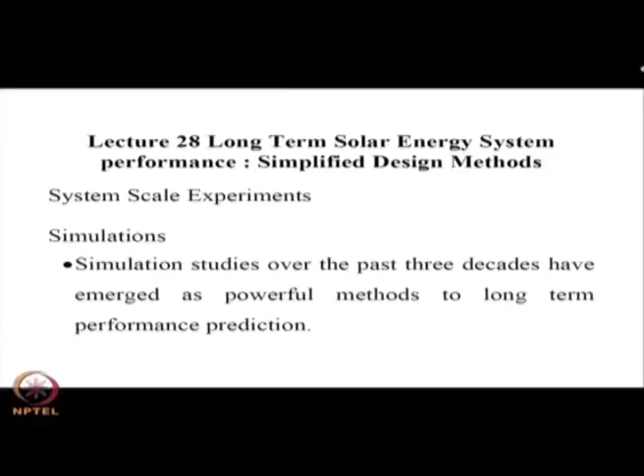The methods available to us are conducting system scale experiments, which could be time taking and of course also expensive, and the effect of parameters cannot be easily studied. Because if you do an experiment for one year with one slope and if you want to change it for another slope, you need another year of study to get that perfect. So, simulations turn out to be the via media, that means you mimic the solar cycle.

You model each component, knit together those models, and give the output of the first module as input to the next module, like for example a solar collector dumping useful energy into the solar tank where the temperature increases, which goes to meet the load. So, we can develop models for a number of types of components, and these things have proved to be effective, taking a fraction of the time—it does not require a year.

And these simulations basically depict the system into several components and employ models to describe each component's performance. The components are coupled with appropriate linking modules. So, this requires a detailed meteorological database.

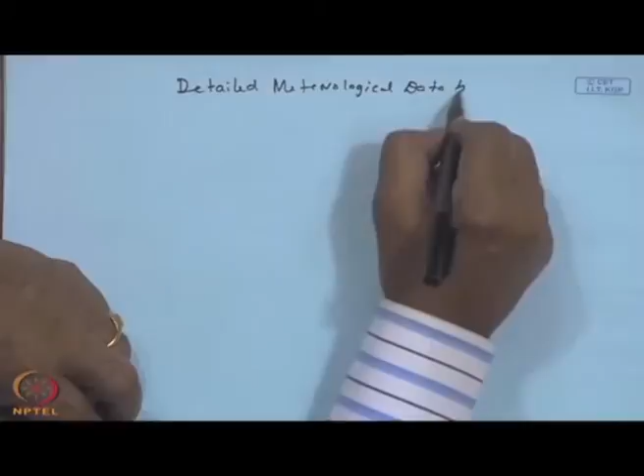One issue is the availability of data and the ready availability of the data. For example, if you consider Indian meteorological stations, monthly averages are available even on the net, but if you want hour by hour data, one has to acquire it from the meteorological station or office in Pune, and then all these numbers may have to be converted into a tape or put into a computer program to get that, which is a laborious task. But however, if it is done once, it can be used.

The other thing is, most of these meteorological stations are at the metros or the cities. It is very likely, because of the premium of the land, that solar energy systems are likely to be installed at smaller places, maybe villages, where actual data collection did not take place. So, in the long run, we might say, though simulations are cheaper, it requires the skill of experts to stitch together the component models, and it requires of course a detailed database.

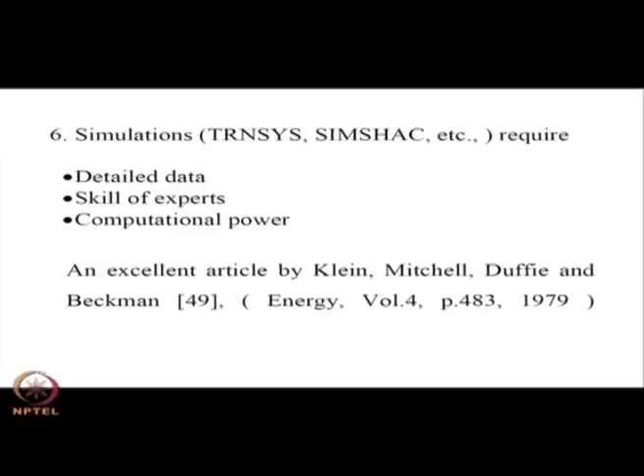So, in one sense, you may say somewhat disadvantages are that you need detailed data, skill of experts, and computational power. So, people have tried to lessen the computational requirement by using a reduced data set, or even at times resorting...

...to synthetic data. Basically, synthetic data mimics the meteorology of the particular location, though it may not exactly satisfy hour to hour, day to day, but in general it will reproduce the averages, which are good enough to get a performance monthly wise or yearly wise.

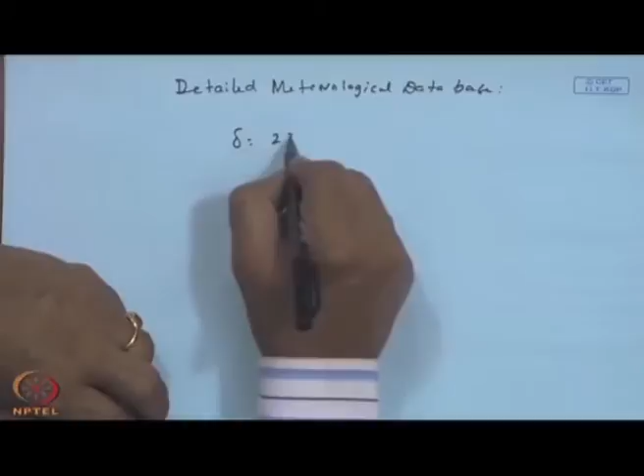This leads to an advantage: almost all the data can be generated through a sort of equations, though your component models could be analytical, which can be clubbed together along with this data. In other words, if I try to give an example, delta equals 23.45 something—this equation is much more amenable for computer implementation than a set of 365 values of data delta for each day.

Now, so if you consider, you will also notice many of the systems are standard systems.

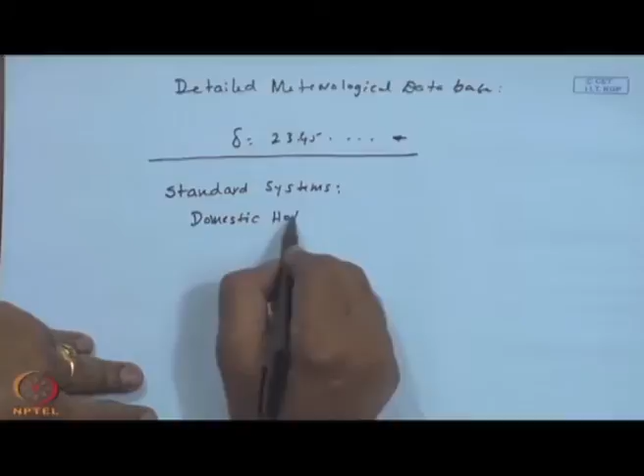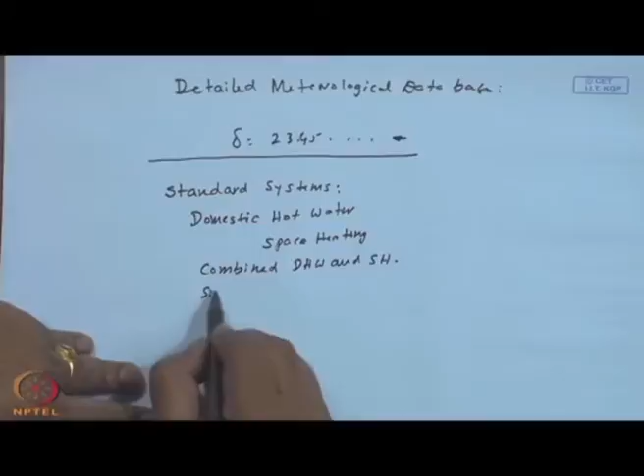Most commonly used could be a domestic hot water, or space heating, or a combined domestic hot water and space heating, or a simple process.

Hot water is used in industry too. For example, if you consider the silk industry, the cocoons are put in boiling water at a temperature of about 80 to 85 degrees. Degreasing is also done around 80, 85 degrees. So there are a number of applications where hot water is required at a given temperature.

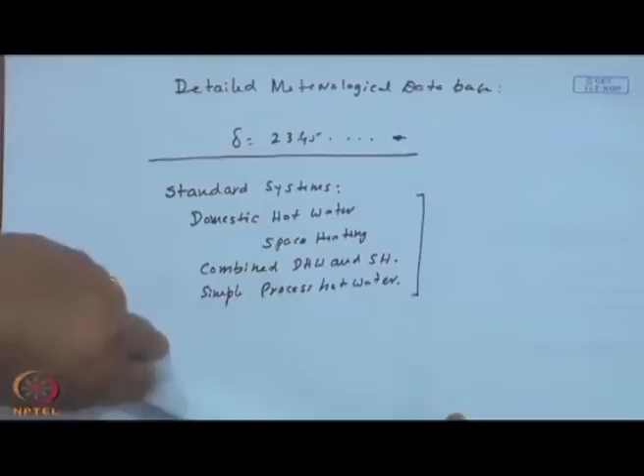These are some terminologies which have become more common in the US, which when we translate to Indian conditions I shall point out slight differences, one has to be a little careful. For example, space heating.

T above 20 degrees C is acceptable. Generally, the comfort condition is approximately 20 degrees centigrade in the room. So any energy available at or above 20 degrees centigrade is useful and can be utilized for the purpose of space heating. Similarly, for domestic hot water, although you may be taking bath at a higher temperature and washing dishes also at a higher temperature, above 20 is also useful.

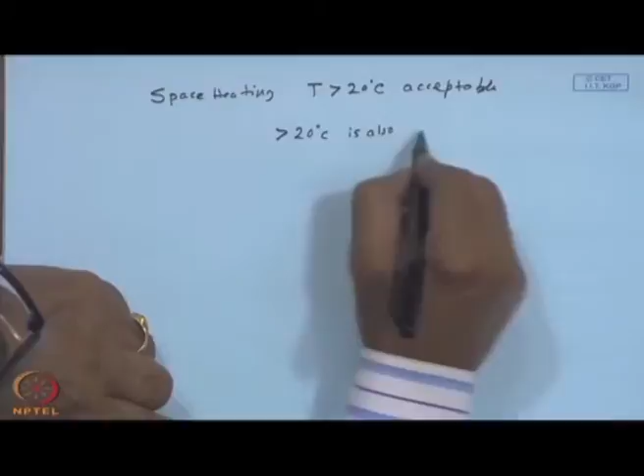For example, if your ambient temperature or the mains temperature is much lower than 20, like 10 or 11 degrees, even to wash your hands you need 20 degrees as a comfortable condition. So particularly in cold countries, there is a lot of application where water needs to be heated from the main supply temperature, typically 11 degrees in the US, to 20 degrees or above.

The methods we are going to talk about, it does not mean they supply only at 20 degrees; they may supply more than 20. But for meeting the load, it is not acceptable to have anything less than 20.

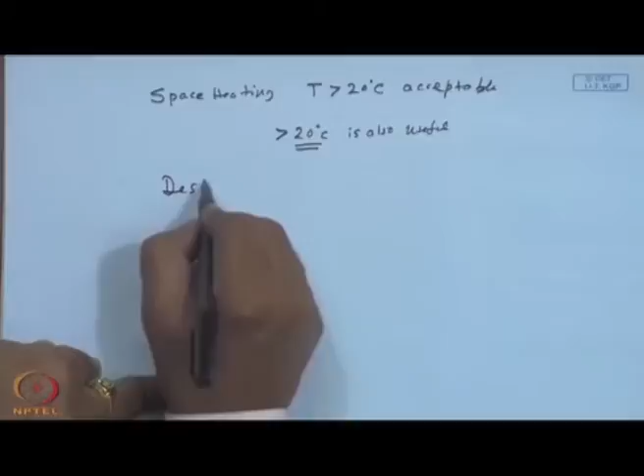Since there are a large number of applications of standard systems, people have come out with what are called design methods. Simulations do serve their role whenever you want to design a large, unconventional system. For large systems, say power generation or solar furnace or solar desalination, every specific detail of that location has to be taken into account, and the investment may be of the order of few crores, so simulation cost is worth it. But if you want 60 liters of water at 60 degrees C for domestic water heating for bathing, the simulation cost may remain the same, but the system cost will be only a fraction of the power generating system. So simulations are not that welcome, and one goes for the standard design method.

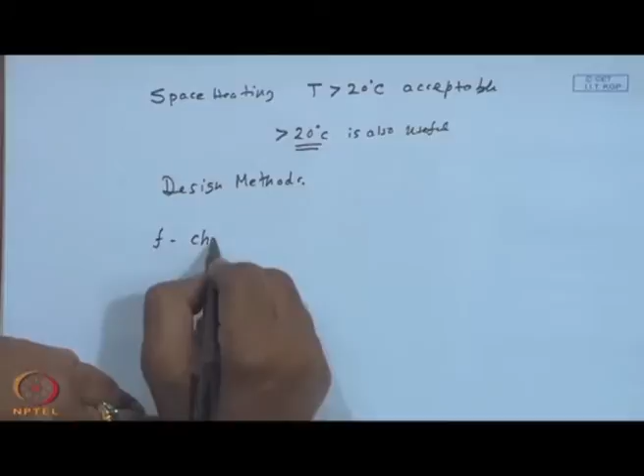This has also been the need of the industry, to have a simplified method without calling for the skill of experts. So some of the resulting methods are popularly referred to as, one, the F chart method, again developed at the University of Wisconsin, Madison, and the other one is the phi bar F chart method.

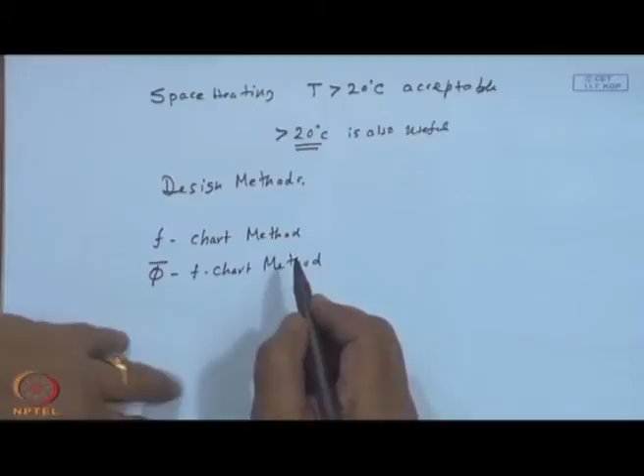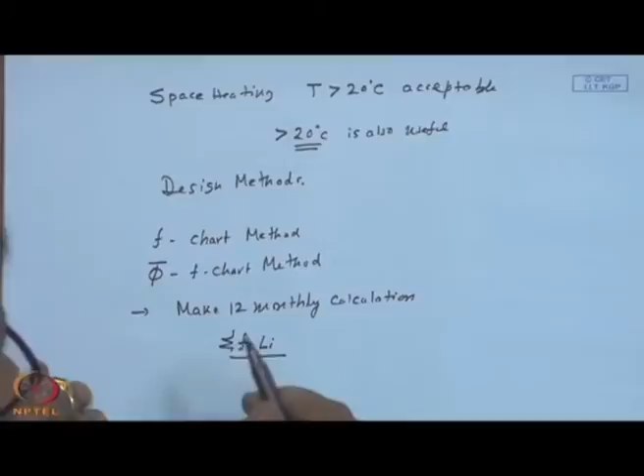I have given the references. These methods make 12 monthly calculations. As we have discussed at length, for solar energy systems, the solar load fraction is the performance indicator. If F is the monthly solar load fraction Fi, and Li is the load on the system for month i, for i from 1 to 12, this gives you the yearly solar load fraction.

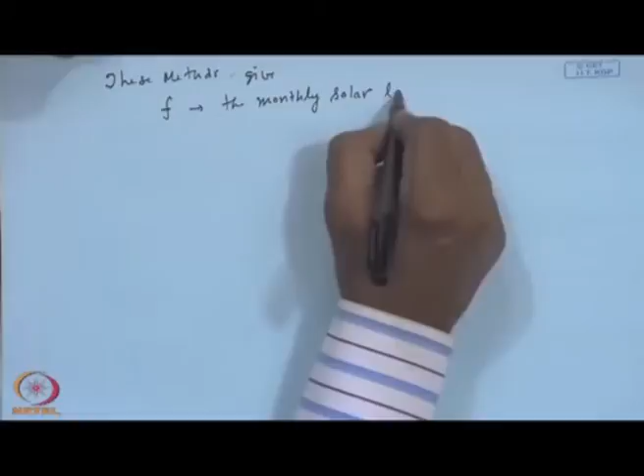So this F chart and phi bar F chart method will essentially give you F, the monthly solar load fraction. We have also discussed earlier that if the energy supplied by the solar energy system is in excess of the load, that excess is not taken into account. So F is always less than or equal to 1.

Now, what is the difference between these two methods? The F chart method is applicable if energy supply at or above 20 degrees centigrade is accepted. So again, contenders could be domestic hot water and space heating and a few other such applications which accept 20 degrees C.

And then in the phi bar, F chart method, you specify T minimum. In other words, you can specify that we want the energy delivery at or above a particular temperature, 60 degrees, 50 degrees, 80 degrees, whatever it is. So T minimum may be 60 or 80, etc.

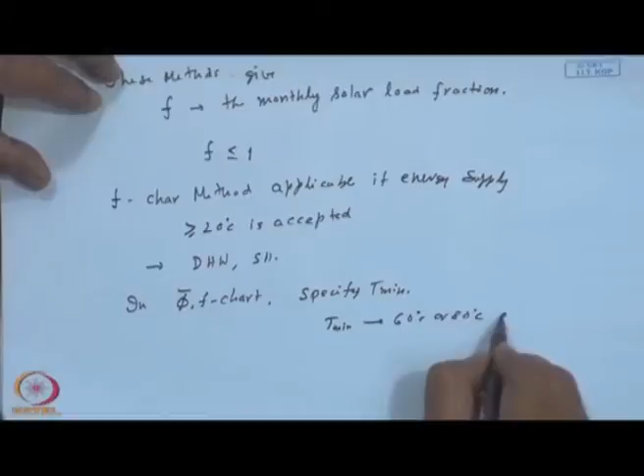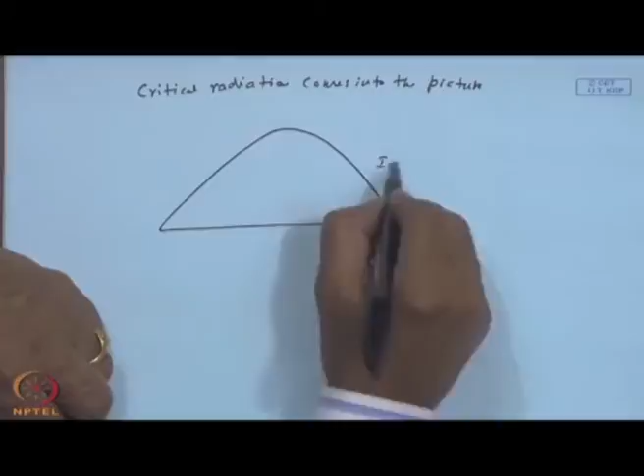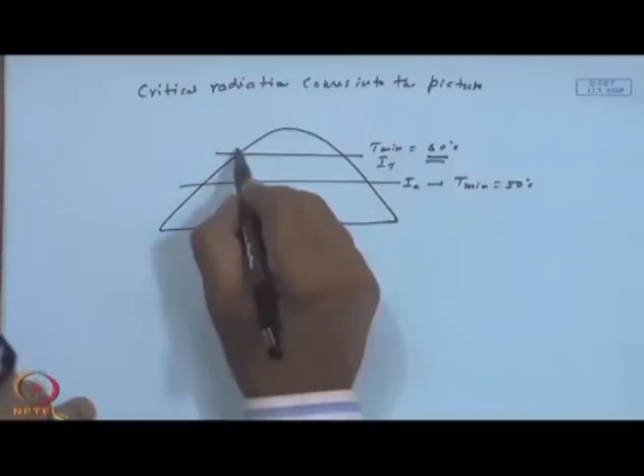Since you are imposing that the energy delivery should be above a particular level, my critical radiation level comes into the picture. For example, if this is the typical solar radiation distribution IT on the solar collector, this is the critical radiation level corresponding to a T minimum of 50, and this one corresponds to a T minimum of 60. So if you want energy delivery at or above 60 degrees centigrade, this part of the solar radiation is useful, whereas if it is at 50, this part is also useful.

So we shall find out what radiation is available above the critical level over a month, and that will be indicated by the so called phi bar, which stands for the monthly average daily utilizability.

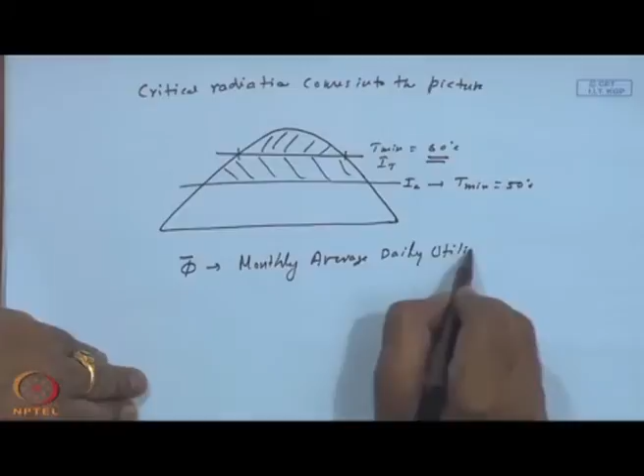We will spend considerable time on how to calculate this utilizability and what is its significance.

At this stage, I am pointing out that the F chart and phi bar F chart method differ because you specify a T minimum. Not all the solar radiation available corresponding to a particular level is useful; it depends upon the T minimum that you want. Higher the T minimum, lower will be the utilizability, and hence my useful energy supplied at or above that temperature, which constitutes a lower or higher solar load fraction. That is why the F chart method is modified with phi bar and called the phi bar F chart method. Now, if you look at it, what are the applicability?

These correlations first of all calculate monthly solar load fraction. So day to day how much of the load is met, it cannot give.

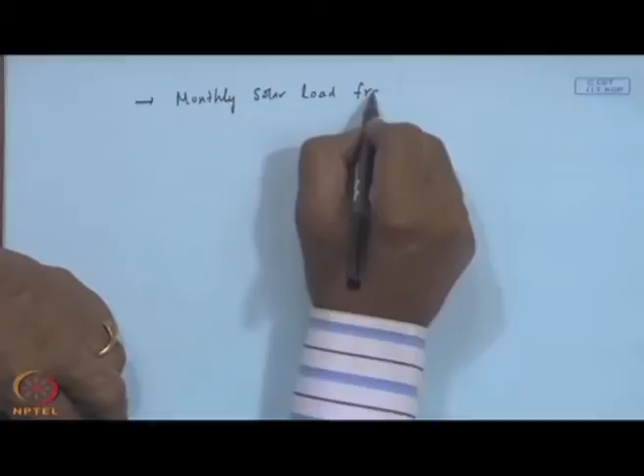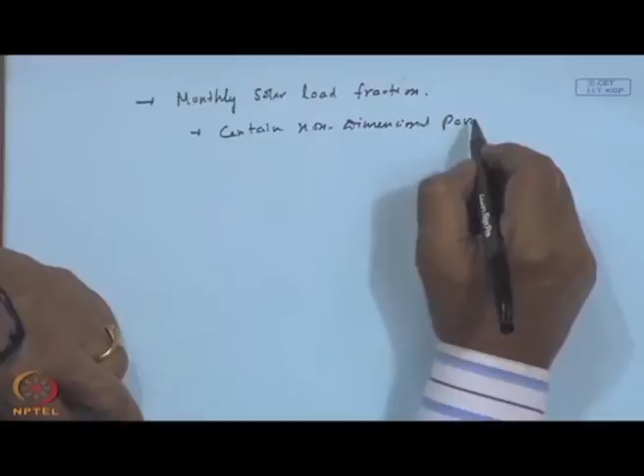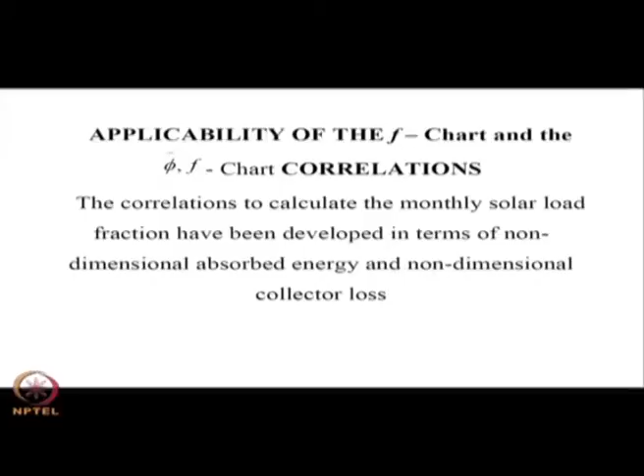They have been developed in terms of certain non-dimensional parameters. There are minor variations between F chart and phi bar F chart for some reasons. One is the non-dimensional collector loss, and the other is non-dimensional absorbed energy.

If this we call it x, and this we call it y, approximately f should be proportional to x minus y if there are no nonlinearities, provided they are consistently unit-wise, scale-wise defined. So you can expect a term like, sorry, it should be y minus x.

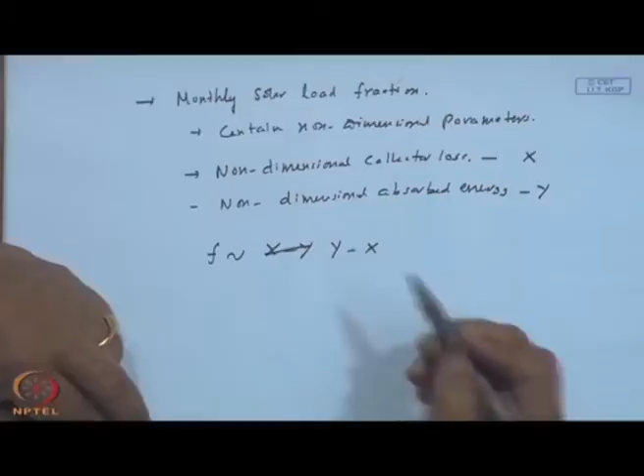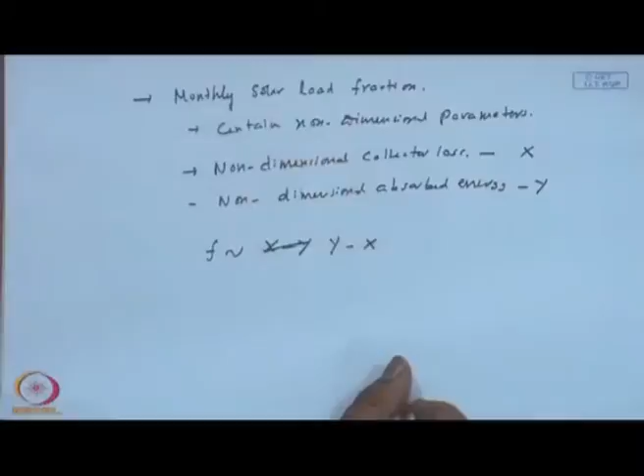Y minus X is the absorbed energy minus the losses. This is my simple useful energy equation, looks like the absorbed energy minus the loss. But on a monthly scale, because of excess energy, because of other losses, because of pumping, because of controls and so on, it will not be a simple linear function of y minus x, but it will be a nonlinear function, which we will see.

So that is why I have already explained the additional parameter is the utilizability that appears in the phi bar F chart method, which in a way takes into account at what temperature the energy is delivered. Now, how are these methods or equations developed?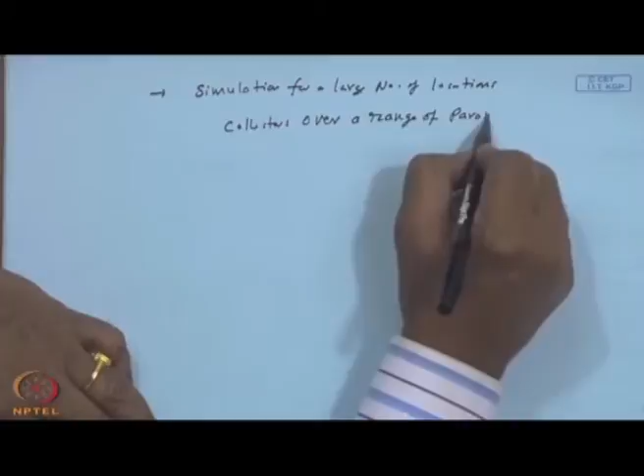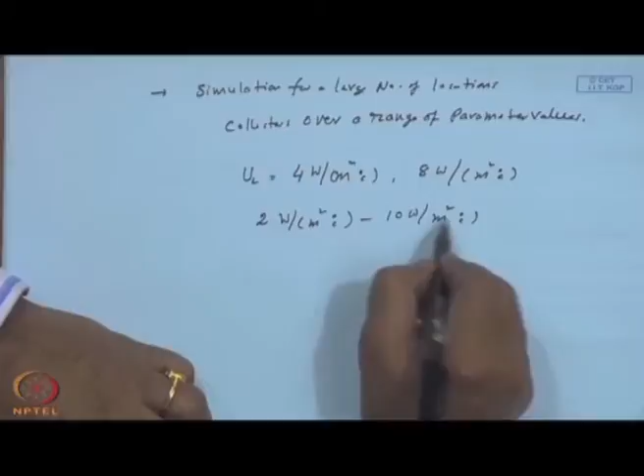You do simulations for a large number of locations, and for collectors, over a range of parameter values. For example, if you consider the overall loss coefficient, typically UL may be 4 watts per meter square degree Celsius for a 2 glass cover, or 8 watts per meter square degree Celsius. So if you do 2 watts per meter square degree C to maybe 10 watts, it will include an extremely good collector and also a fairly bad collector. That is how these correlations are developed.

Now, what do we mean by standard systems? Four figures are shown here. For example, you have a collector with a heat exchanger which dumps through another heat exchanger into the storage. From the storage it may go to an auxiliary tank, from which it goes to the tap. So that forms part of the combined liquid-based space and water heating system. And then through the delivery device and another heat exchanger, it goes to the house, which will be meeting the space heating. The auxiliary will come in whenever the solar is insufficient, either for hot water or space heating.

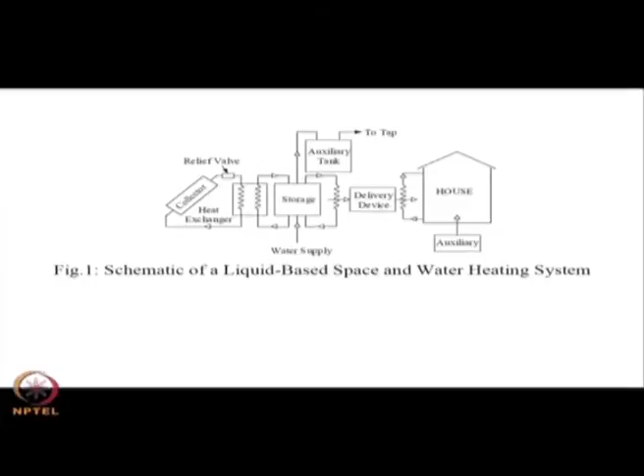So suppose I do not have a heat exchanger between the collector and the storage loop, I can put the effectiveness of the heat exchanger as unity, then automatically it takes care of the fact that the collector is dumping or delivering energy directly to the storage. If the auxiliary tank is not there, there will be no loss, and of course the delivery will depend upon the temperature available in the storage tank.

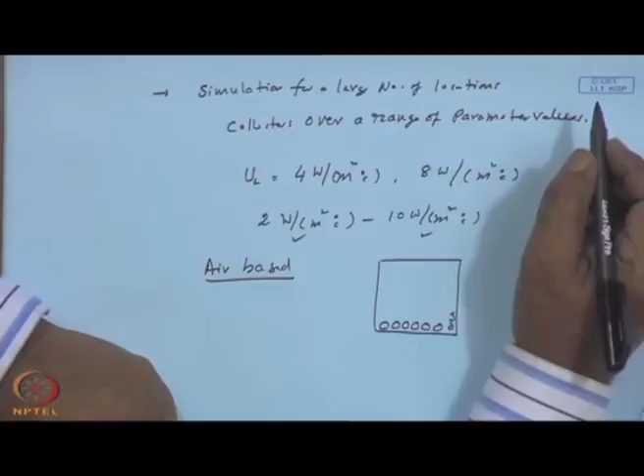Next one is a typical and similar system, but it is air based. The difficulty with an air-based system is you cannot store energy easily, because the product of specific heat and mass is smaller. So what you do is, rather it requires a huge volume with losses, you store the energy in the so-called pebble bed. A pebble bed is nothing but a pit, which you can put underground with about 1 inch pebbles all packed. So when there is excess energy, the hot air goes through that, heating the pebbles, and then when there is no solar energy, cold air goes through the pebble bed, picking up the energy that was stored during the charging time.

So the third one is a closed loop system. Similarly, an auxiliary heater is put again in series, so that it can make up the deficiency in the temperature or deficiency in the quantity.

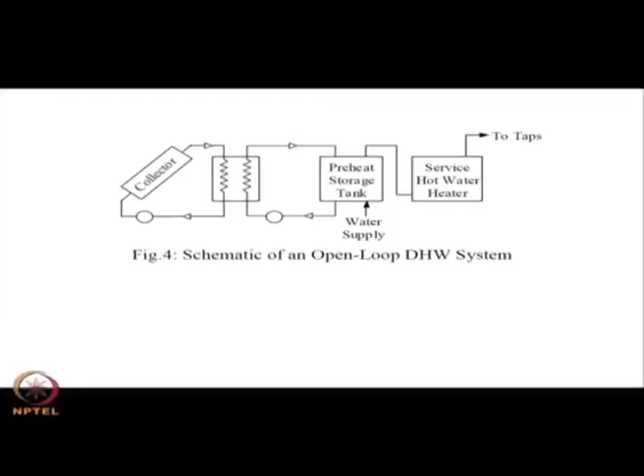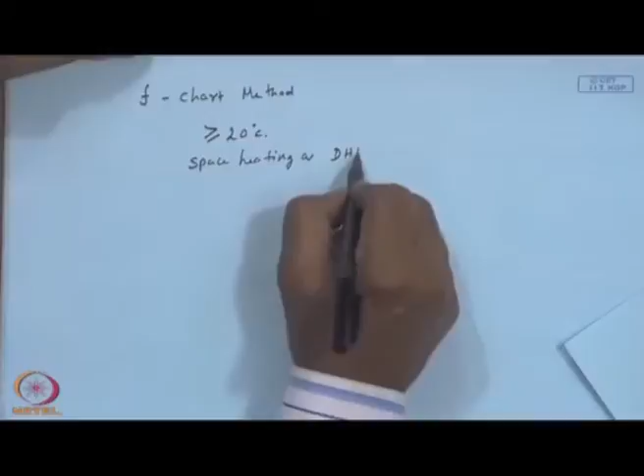Now, if I try to separate the F chart and phi bar F chart method, somebody can ask what are the limitations, or under what conditions the F chart method is applicable. So at or above 20 degrees Celsius, generally we said it applies for space heating or domestic hot water, and is also used for service hot water with a modification.

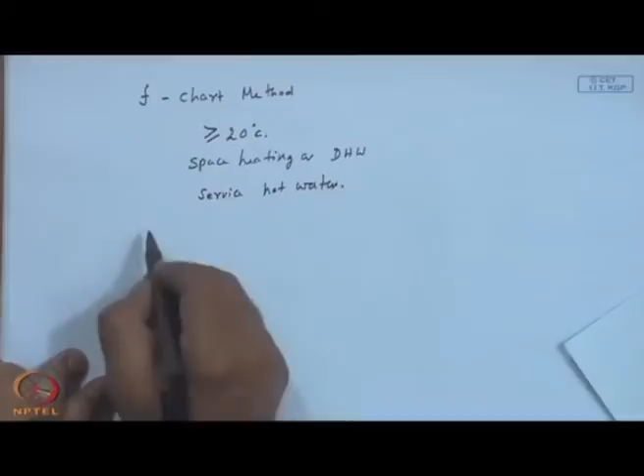It is correlated to two non-dimensional variables: a non-dimensional collector loss. So F is a function of x and y, where x is the non-dimensional collector loss, and y is the non-dimensional collector absorbed energy.

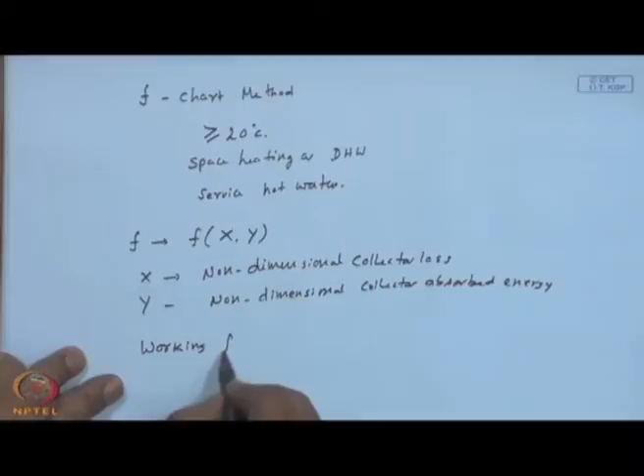The specific numbers form will be the same. Correlation for air based systems and liquid based systems differ slightly. In general, air based system means the working fluid in the collector that picks up the useful energy is air. I have not really seen or heard of a gas being used instead of air, except in some refrigeration applications where people are trying carbon dioxide, etc. In liquid based systems, mostly it is water, though antifreeze, glycol, etc. may be used, or a thermic fluid also can be used, where the thermal capacity characteristics will be better, so that your storage will be less volume wise, etc.

In F-chart and phi bar F-chart, they assume all the collectors are connected in parallel, so that each collector receives the same inlet temperature, and if the size and everything is same, delivers at the same temperature. Consequently, the performance will be a function of the number of collectors, or the area, directly proportional.

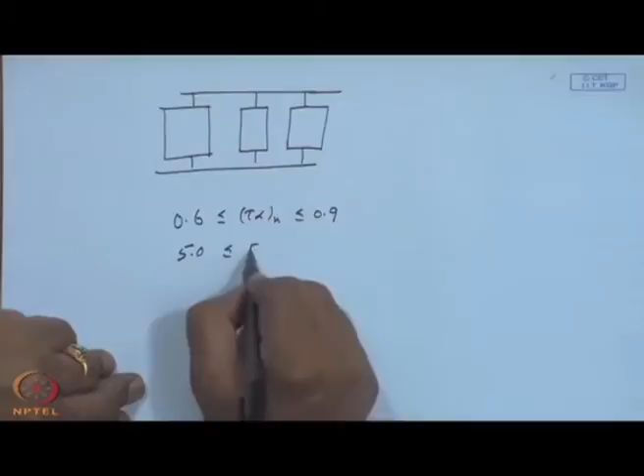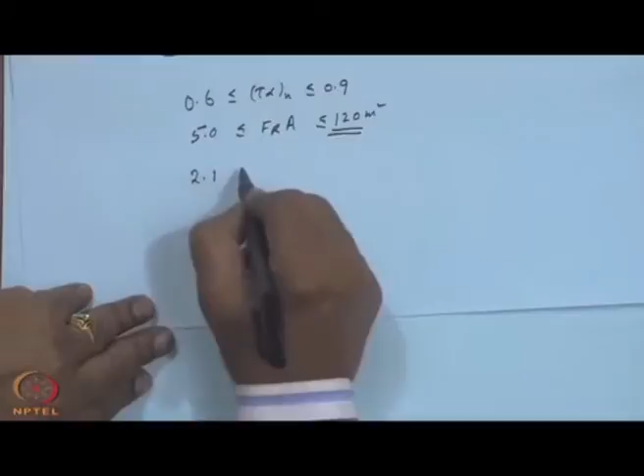This is a wide range for which the simulations have been developed, based upon which the correlations have been formulated. First, the material property, tau alpha normal, ranges 0.6 to 0.9. This is the product of heat removal factor and the area of the collector, up to 120 meter square. This appears somewhat lower, but possibly assuming linearity one can go for a higher range also, though strictly speaking they are expected to give acceptable results when applied in the ranges we are specifying. UL can vary from 2.1 to 8.3 watts per meter square degree C, and slope beta ranges from 30 degrees to less than or equal to 90 degrees.

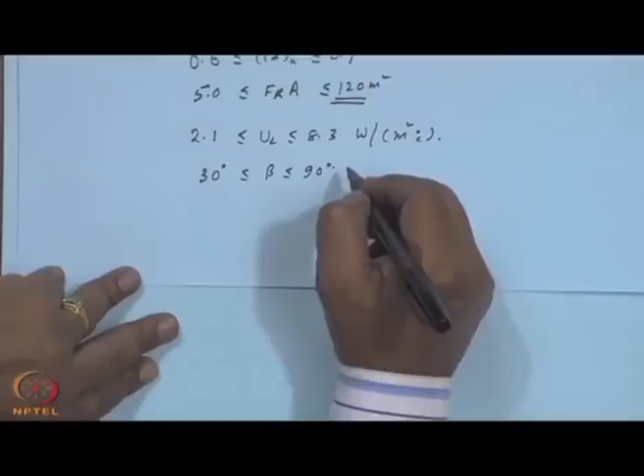This seems to be a little limitation if you apply it for a tropical climate, let us say southern India, where your latitudes will be lower than 30. In fact, most of India is less than 30 degrees, so this beta may be a limitation, and this will come up again.

Building heat loss coefficient is measured in watts per meter square per degree C. U is the overall loss coefficient, and A is the surface area of the building. U into A gives a product which, when multiplied by the temperature difference outside, gives the loss taking place from the house. From this loss, I can calculate the space heating load.

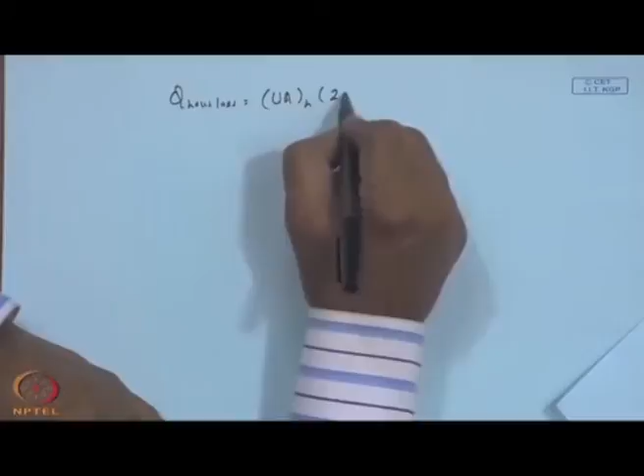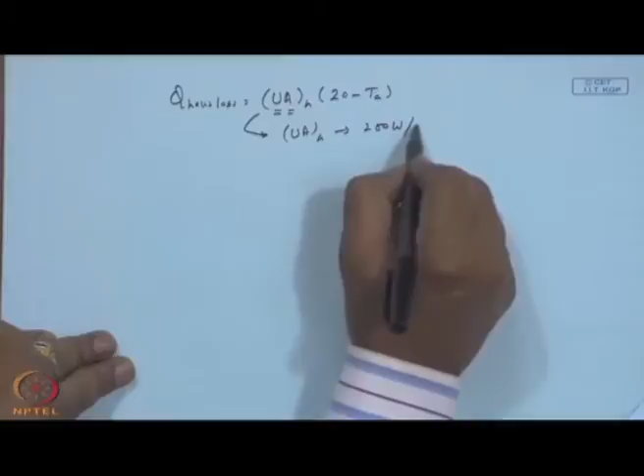If the house is kept at 20 degrees C and the ambient is, say, 13 degrees C, then Q house loss equals UA of the house times 20 minus T ambient, in a simplistic manner, though it may have to be averaged or weighted averaged over a period of time. This is the overall loss coefficient multiplied by the participating area multiplied by 20 minus T ambient. For a standard construction of 1 or 2 bedrooms, UAH typically ranges from 250 watts per degree C to 600 watts per degree C, depending upon how well it is insulated.

This is used for calculating the space heating load, and the other symbols like UL, FR, tau alpha normal and beta we are already familiar with.

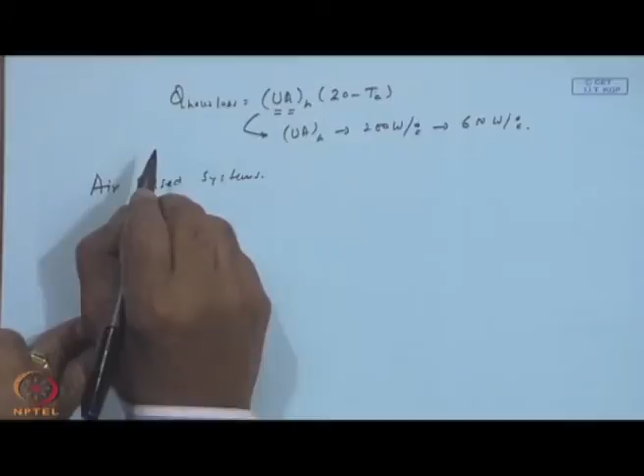For air based systems, there are other variables besides tau alpha, A, FR, UL, beta and UAH. What is the flow rate, particularly for air based collectors?

In the case of air collectors, the heat transfer coefficient strongly depends upon the air flow rate, and the stratification in the pebble bed may be seriously affected depending upon the flow rate. In other words, you expect higher temperature air to be at the higher level because of lower density, and if a gust or blast of air goes through with high velocity, this stratification may be disturbed. Consequently, storage performance will be affected if the flow rate is too high. So there is a standard flow rate for which the simulations have been made.

That standard flow rate is 10 liters per second per meter squared.

Yes, 10 liters per second per meter square of the area. So, you expect that the correlation to be valid if your flow rate is around 10 liters per meter square, 9.9 is fine, and the storage size

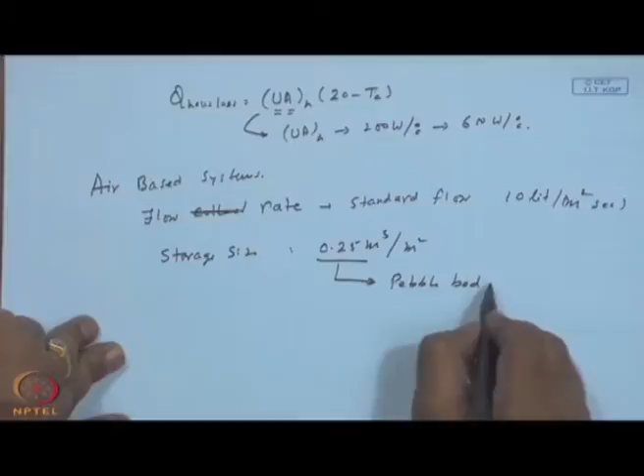is 0.25 meter cube per meter square. This is the pebble bed volume, the pit we were showing earlier in the figure. So, you provide 0.25 meter cube per square meter of area.

Now, if you take into account the specific heat of the pebbles, roughly 1 inch size and randomly packed, this may correspond to a heat capacity about 350 kilojoules, which will be relevant in the case of water heating systems, once you specify the mass specific heat product of the storage tank, assuming the fluid to be water.

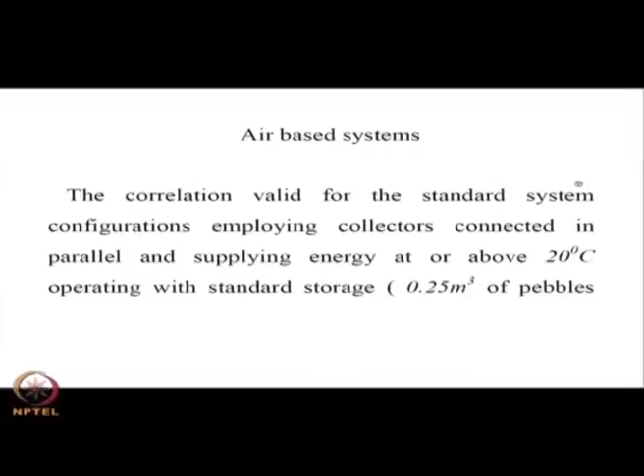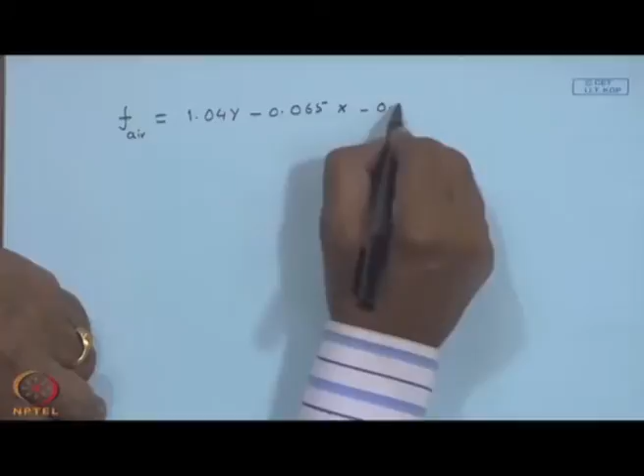So, the solar load fraction for air based systems. For the sake of clarity, I will write F subscript air equals 1.04 y minus 0.065 x minus 0.159 y squared plus 0.00187 x squared minus 0.0095 y cube, where x is

the non-dimensional collector loss, F r U L times 100 minus T A bar into delta tau times collector area A C by L. So, this will be non-dimensional. If L is in joules, U L will be joule per second meter square degree centigrade, and delta tau will be in seconds, area will be meter square, and this temperature difference is again degree C.

So, this U L is in this much, so numerator is joules and denominator also is in joules. Now, what you will find here is the number of seconds in the month is delta tau.

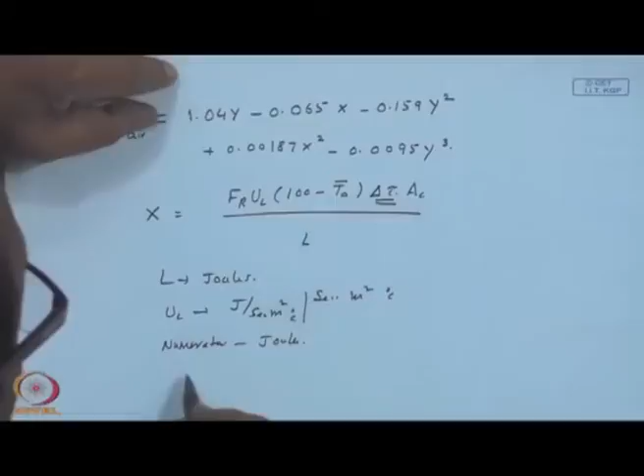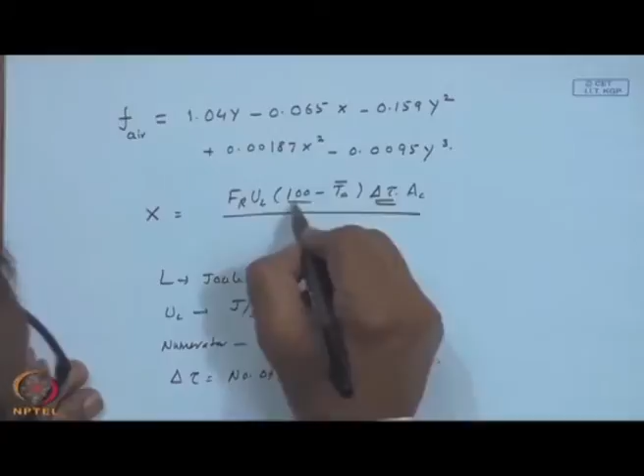AC is area. It is not unexpected that the loss factor should be proportional to the U overall loss coefficient. Of course, this is a non-dimensional factor: the time, area, and 100 minus T A bar. This 100 has nothing to do with the boiling point of water, though I think it somehow gives that impression.

It's just that 100 minus T A is used to scale x. If I put it as 20 minus T A, or whatever is the collector operating temperature minus T A, we may get too large or too small a value for x. So, it is desirable, whenever you have any empirical correlation in general, that if the variables are of comparable order of magnitude, your accuracy will be better.

If x is something like 0 to 10, y is 0 to 3 or 0 to 4, you will have a better correlation. Instead, if y changes from 10 to the power 6 to 10 to the power 9, and x changes from 10 to the power minus 3 to 10 to the power minus 1, the effect of x, I mean y, will be completely lost, because the scales of those numbers are hugely different from each other.

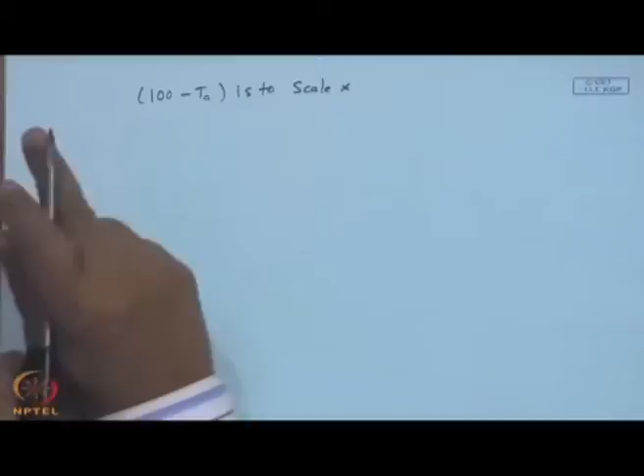So, that is the non-dimensional collector loss, and I will again make a comment after I define this y, the non-dimensional absorbed energy: F r tau alpha bar into H T bar times n into A C upon L. A C is the area, n is the number of days in the month, H T bar is the monthly average daily radiation on the collector surface, multiplied by the monthly average transmittance absorptance product, multiplied by the collector property heat removal factor upon the load.

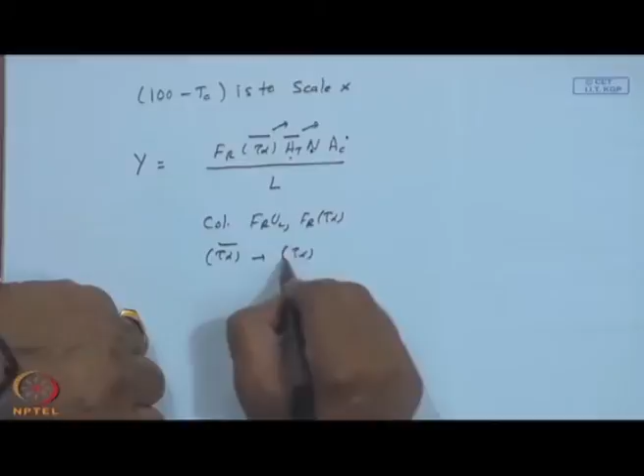Now, you will understand all the processing we have done is to get this H T bar, get this tau alpha bar, and of course, in the previous definition of x, U L and F r. That means my collector parameters: F r U L and F r tau alpha, and then my tau alpha bar comprising of tau alpha bar beam, tau alpha bar diffuse, tau alpha bar ground.

So, all the trouble we have gone through is worth it. It comes into the picture now in calculating my y, and the geometry is related ultimately through F r. So, these symbols are explained, and L is the load on the system. So, given the collector parameters, I can calculate.

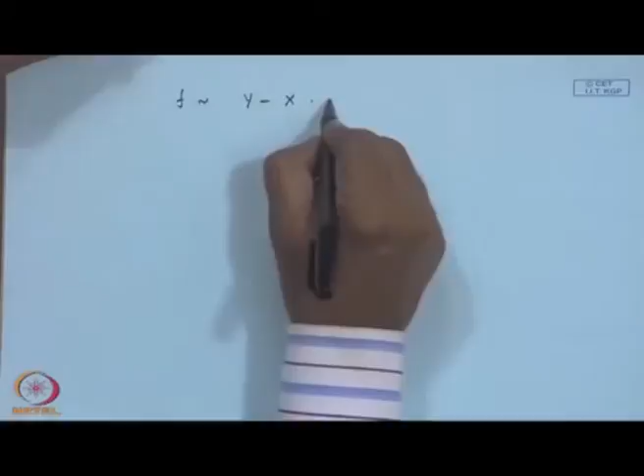Now, the comment I was trying to make was, initially I just said that f should be, because non-dimensional, y minus x. Of course, there are non-linearities, x squared and y squared, because of the losses, etc. So, the constant associated with y is 1.029 y, pretty close to 1, whereas this is 0.065,

approximately 1 by 16th, which without the benefit of a computer, what I think is: 100 minus T A is inflated by a factor of 4, and delta tau is inflated by a factor of 4, because typically if the collector operating period is 6 hours, the losses do not take place from the collector all 24 hours.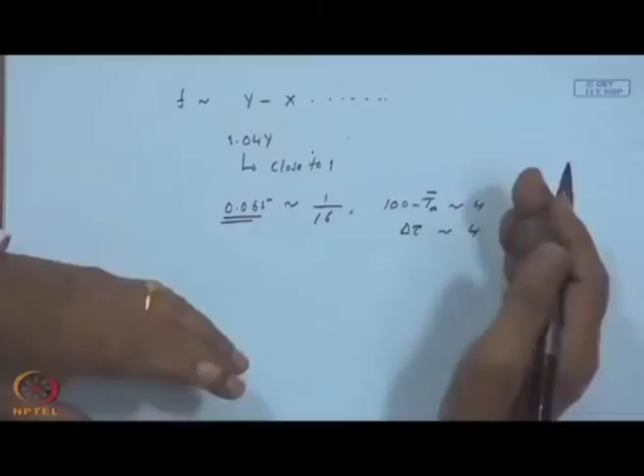Tank losses may be there, pipe losses may be there, but the collector is shut off. So there is a sort of overestimate of the collector in terms of the delta tau being 24 hours, and this 100 minus T A may be typically 3 to 4 times the actual temperature difference responsible for the losses. So I have got a factor of 16, that becomes 1 upon 16, which fortunately, according to my imagination, almost coincides with 0.065.

So the other things are the nonlinearities. At times why I specifically mention this is it is not just the imagination part of it. You will have a sensible correlation if you can think of what could be the functional form, and what type of relation a particular dependent variable may have with the independent variables.

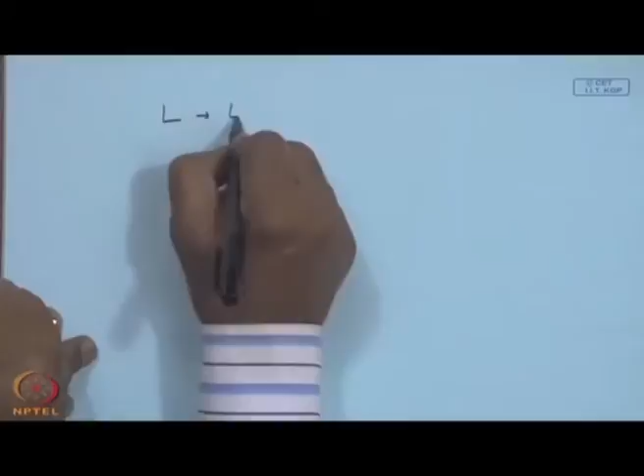So load in general may consist of space heating load and water heating load and loss from the tank. In the water tank there will be a certain loss taking place, so that is also a part of the load to be met by the system. Of course, at times this loss may be contributing to heat your room, then we will not take that into account.

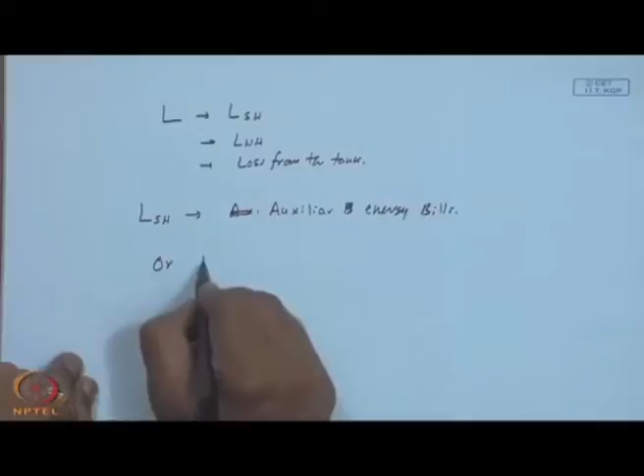So we will go one by one how to calculate these things. LSH, the simplest way, is from auxiliary bills. If it is an already occupied house and has a space heating system, be it gas heated, electric heated, or steam heated, one can find out the utility bill and determine the space heating load. Or you can estimate LSH as the building loss coefficient multiplied by DD.

DD is the degree days, not an official designation. This is degree C day, I will explain to you. This converts it to hours, this converts it to seconds, because this UA is watts per degree C, that is joule per second degree C, multiplied by seconds, that makes it joules per degree C. So this is degree C day, with day converted into seconds.

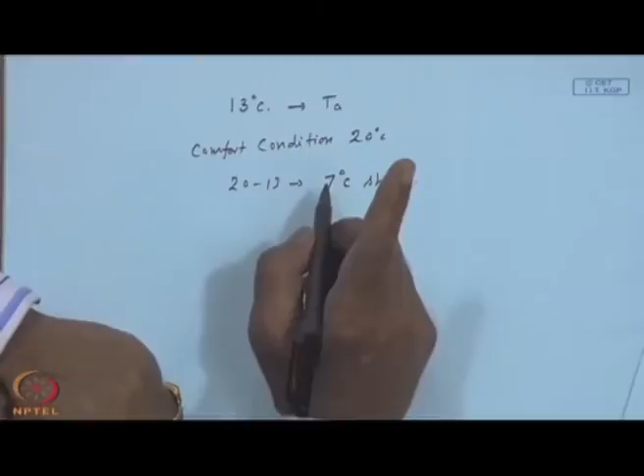If you have an ambient temperature of 13 degrees, let us say, and the comfort condition, T A comfort condition, is 20 degrees C, then 20 minus 13 is 7 degrees C short. If this lasts for 1 day, suppose ideally my comfort condition does not change, it is 20 degrees C, and throughout the day 13 degrees C is maintained, then this will be having 7 degree days. If the ambient temperature is 13 and the comfort condition is 20, it is deficit by 7 degrees, so you have a degree days of 7.

Now of course this 13 may be varying - 2 hours at 13, 17 for 1 hour, 12 for 3 hours, so on and so forth. So proportionately you can calculate how many degree days each one contributes. If it is 2 hours at 13, it will be 2 by 24 into 7; 1 hour at 17 is 3 into 1 by 24, so on and so forth, and one can come out with the total number of degree days in the month.

That is what we are calculating, so degree C day is for the month. So you can calculate from the building loss coefficient and the degree day data what is the space heating load. Another thumb rule, approximately, if T A bar...

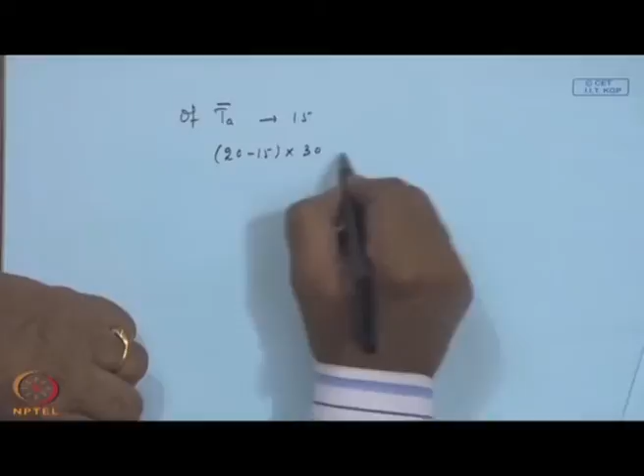let us say the monthly average daily ambient temperature, which you can see from the meteorological data in books like Anna Mani for Indian locations, or Duffie and Beckman for US and Canadian locations, or the Ministry of Non-Conventional Energy Sources website these days - if T A bar is, let us say 15, then 20 minus 15 is 5 degrees multiplied by 30, that will become 150 DD approximately. If my ambient temperature is 15 degrees for the monthly average, and if 20 degrees is the comfort condition, then 20 minus 15 deficiency is there, so 150 degree days will be there.

Of course, the biggest approximation is this 15 may be comprising of 10s, 20s, 27s, 22s, consequently it may not always be 5. But if T A bar is significantly lower than 20, maybe 15, 12, this is a very good calculation. You can check yourself, and with the data available in the sources I mentioned, as long as T A bar is less than 15, you can easily estimate the degree days within plus minus 5 degrees. Of course, if T A bar is 20, it does not mean it does not require heating - you may need both heating and cooling, daytime cooling and nighttime heating.

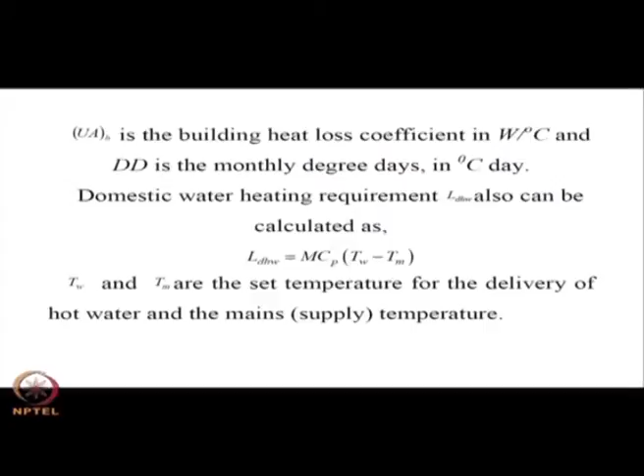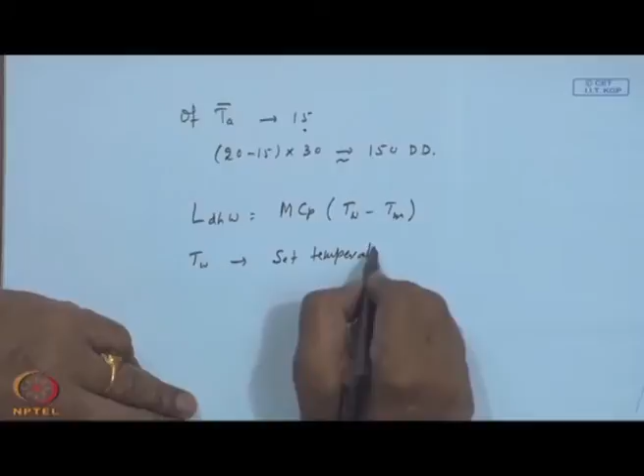Then the domestic hot water requirement, LDHW, is mass of water - 500 liters, 200 liters, or in kgs - multiplied by specific heat, multiplied by TW minus Tm. This TW is the set temperature, and Tm is the supply or mains temperature.

Keep in mind, the excellent textbook is by Duffie and Beckman, based in the US. There, the supply or mains temperature is usually the ambient temperature plus or minus a few degrees. This temperature is like a geyser's thermostat, set for 60 or 70 or 55 degrees, whatever it is. Many times we may not know it, but it is set for a certain temperature, so it cuts off when water inside the tank is heated.

This in no way says that my solar energy system, designed based upon the F-chart correlation, delivers at 60 degrees. What we are doing is, if I store 500 liters of water with the conventional system to deliver at 60 degrees centigrade, when the mains are at a particular temperature, 11 or 15 degrees C, then this is the quantity of joules we have to supply. Consequently, this is the load on the system, but not a guarantee on the quality of energy delivered, nor is it expected.

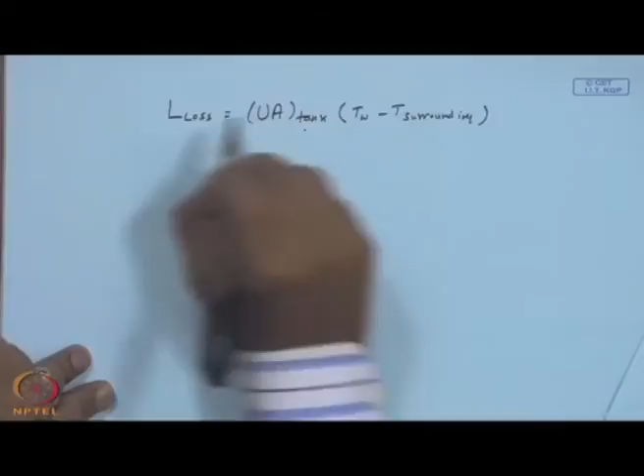Then there's L loss, lastly, UA of the tank - just like UA of the house, you can easily estimate the UA of the tank. This is the set temperature, so the tank will be basically inside at TW, losing heat to a surrounding temperature T-surrounding, instead of TA. The whole tank may be in a closed basement or inside your house, so it may not be losing heat to the ambient. With this UA tank, one can estimate based on how much insulation is there, what is the diameter, the free convective heat transfer coefficient, conduction resistance, and the area of the tank, or use the manufacturer's specification.

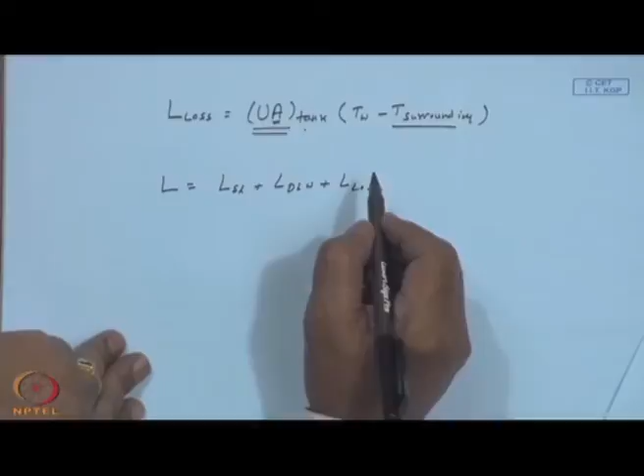So the total load L should equal LSH plus LDHW plus L loss, where the three components are written as UAH into DD into 24 into 3600, plus MCp into TW minus TM, and UA tank into TW minus T-surrounding.

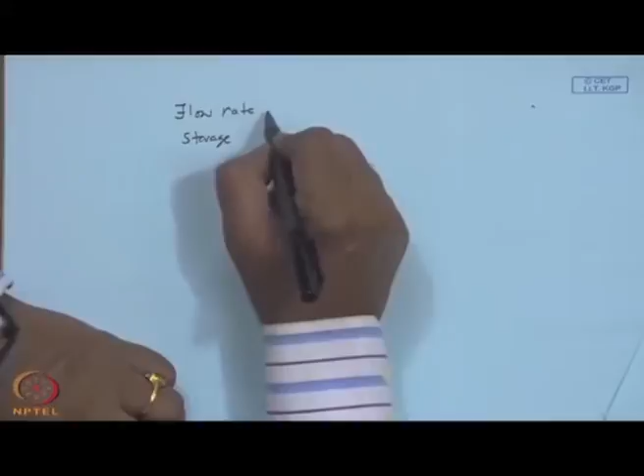Now most importantly, since other ranges of parameters are given, flow rate and storage are the two variables. Flow rate can be changed if you want to improve heat transfer characteristics - for example, instead of 10 liters you may use 15, though pressure drop may be more, or it may go lower. Or storage instead of 0.25 meter cube - if it's a tropical climate, for the same energy or collector area you may provide 0.3, 0.35, or a larger storage.

So instead of another correlation for each flow rate and each storage, when flow is non-standard, they correct the variable as Xc equals X times actual flow rate by standard flow rate, to the power 0.28. If actual flow rate is 15 and standard flow rate is 10, this ratio is 1.5, and 1.5 to the power 0.28 is more than 1, so I get an Xc more than 1. It's a little counterintuitive, but as I said, it has more to do with stratification.

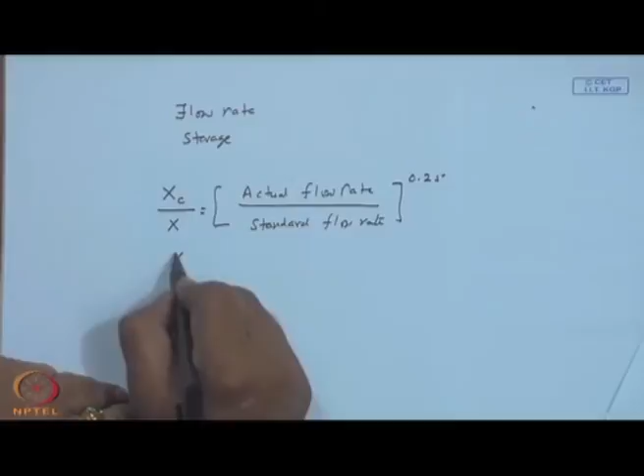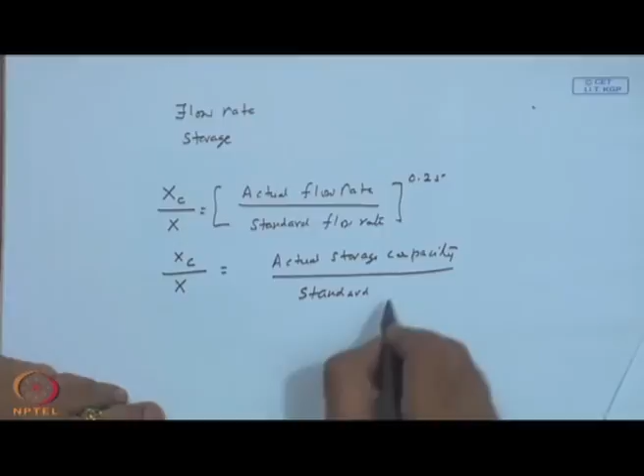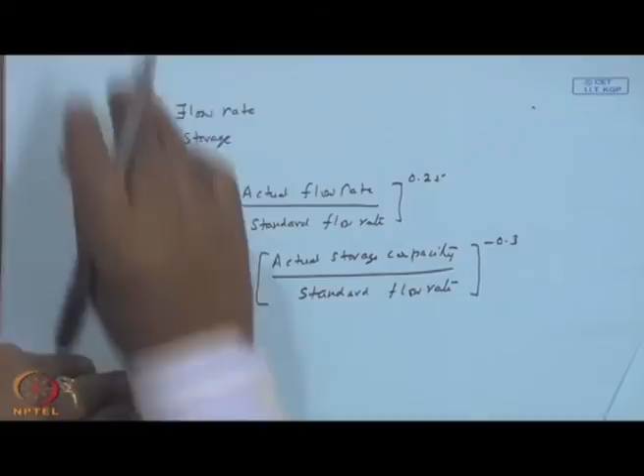This is actual storage capacity upon standard storage capacity. You can see that if actual storage capacity to the power minus 0.3 is more, this ratio will be less than 1, making Xc lower. If Xc is lower, my F is higher. So if storage is more, my solar load fraction should be higher, which is borne out by this particular relation.

So these are the correlations for the air-based solar heating system, which can be expected to deliver energy at or about 20 degrees C. For an air-based system, it will supply domestic hot water or space heating, and combined domestic hot water including space heating. So we have corrections for non-standard flow rate and non-standard storage given - simply, the coordinate Xc is the corrected value if X is the one for standard storage. This is how you modify it.

Now you might wonder why X is changed and not Y. The answer is these are correlations - it is found that they actually correlate with the simulation results better, and consequently X is corrected in this particular situation. Thank you.